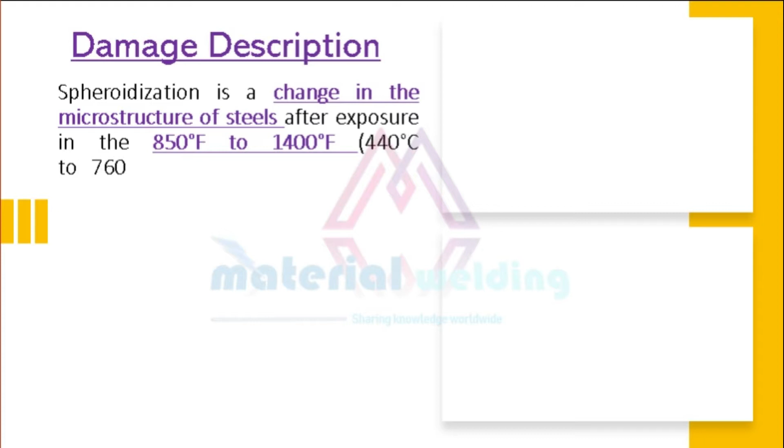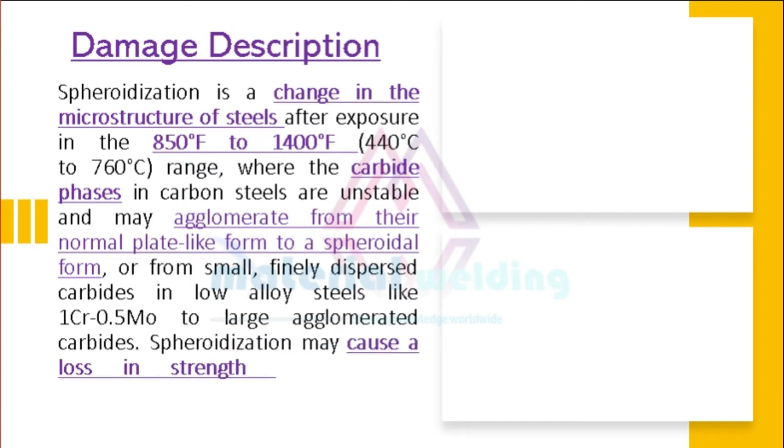So what is spheroidization? Spheroidization, also called softening, is a change in the microstructure of steels resulting from exposure in the temperature range of 850 degrees Fahrenheit to 1400 degrees Fahrenheit, or 440 degrees Celsius to 760 degrees Celsius.

At this temperature range, the carbide phases in carbon steels and carbon half-moly steels are unstable, and may agglomerate from their normal plate-like form to a spheroidal form, or from small, finely dispersed carbides in chromoly steels to large agglomerated carbides. Spheroidization may cause a loss in strength and/or creep resistance.

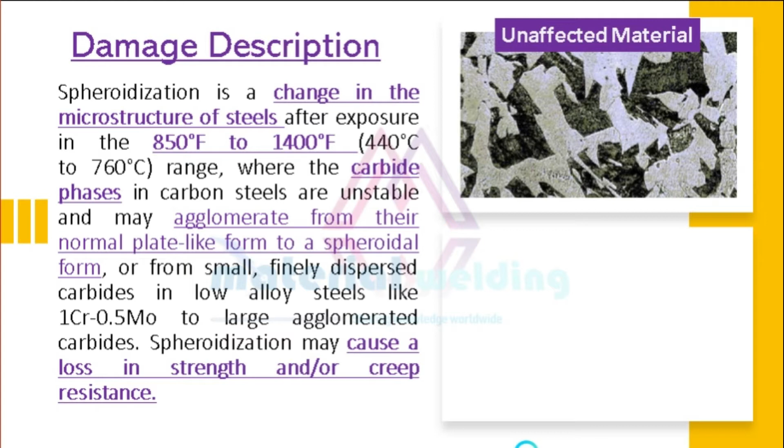The first picture shows the unaffected base metal of a carbon steel having pearlite and ferrite microstructure. When this material is exposed to high temperature above 850 degrees Fahrenheit, spheroidization takes place as visible by the black area in the second picture.

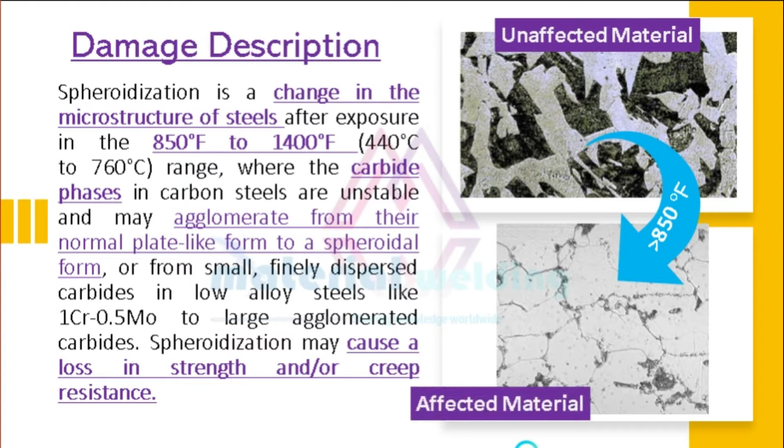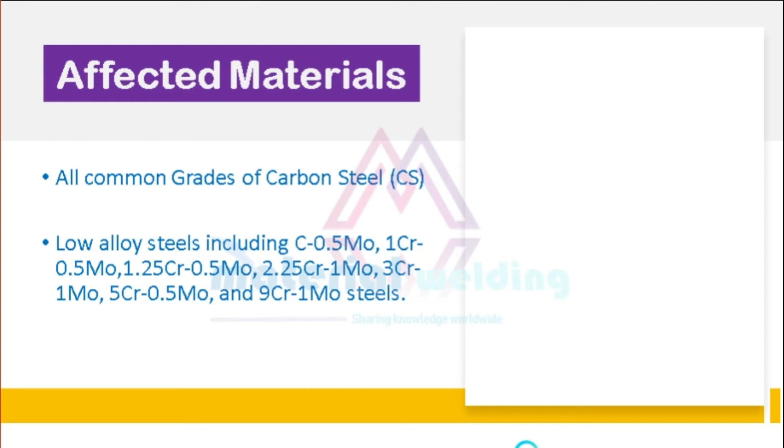Let's know which materials are affected by spheroidization. Spheroidization takes place in all common grades of carbon steel used in refineries. The low alloy steels such as carbon half-moly and chrome moly steel from 1 chrome half-moly to 9 chrome 1 moly are included. So basically, the full range of chrome moly steels are prone to spheroidization.

Critical factors for spheroidization. The primary factors affecting spheroidization are: A, chemistry of base metal; B, microstructure; and temperature and time of exposure.

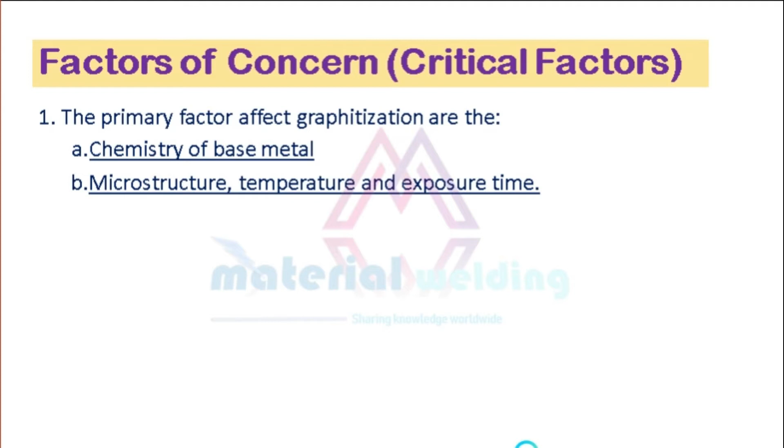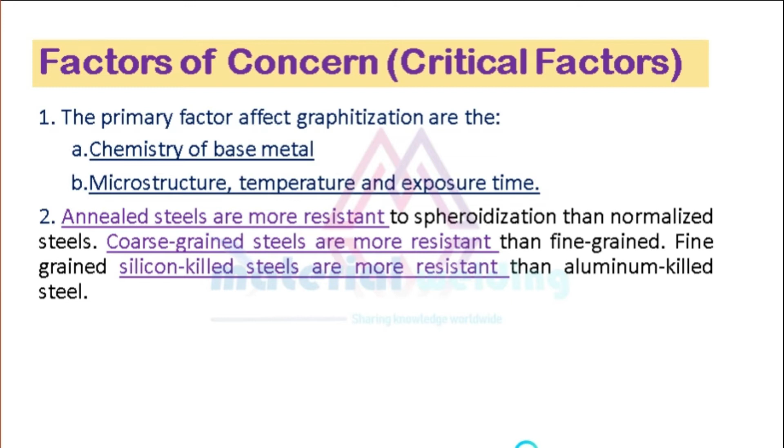If we talk about types of steel: first, annealed steels are more resistant to spheroidization than normalized steels. Second, coarse-grained steels are more resistant than fine-grained. And third, fine-grained silicon-killed steels are more resistant than aluminum-killed steel.

Time temperature transformation in spheroidization. The rate of spheroidization depends on the temperature and initial microstructure. Spheroidization can occur in a few hours at 1300 degrees Fahrenheit or 552 degrees Celsius, but it may take several years at 850 degrees Fahrenheit or 454 degrees Celsius.

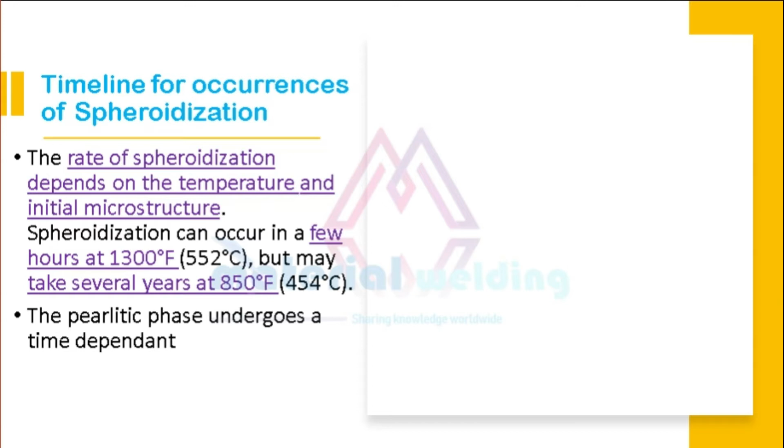So temperature is a critical factor for the transformation to occur. Higher service temperature means faster development of spheroidization. During spheroidization, the pearlitic phase undergoes a time-dependent transformation from partial to complete spheroidization, as shown in the figure here.

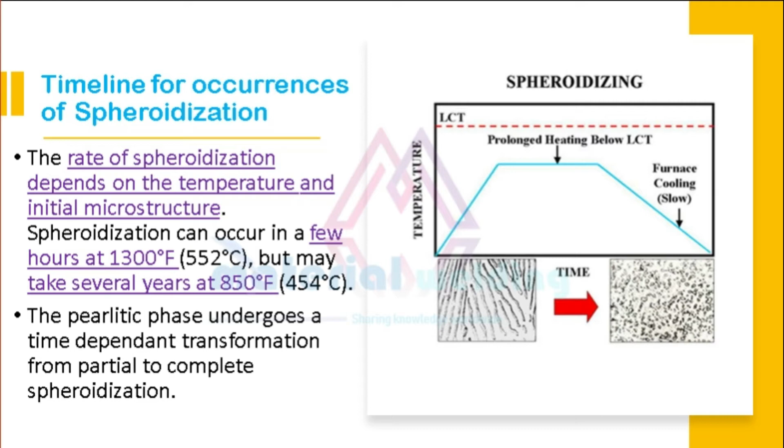Detrimental effect of spheroidization: it results in loss of strength, usually accompanied by an increase in ductility, which allows for deformation at stress concentrations, along with loss in creep strength.

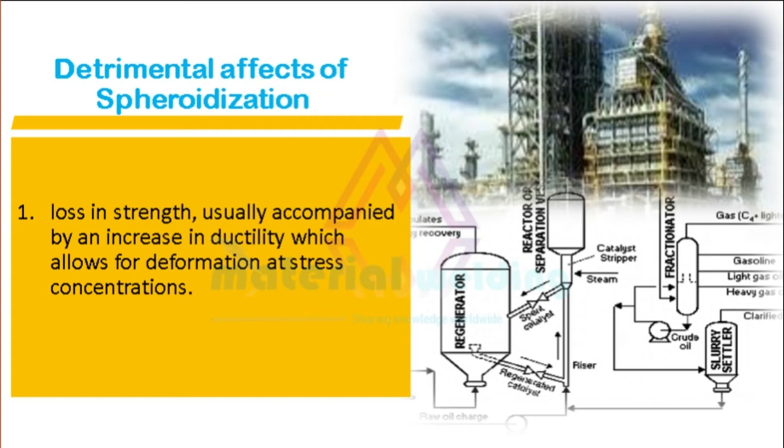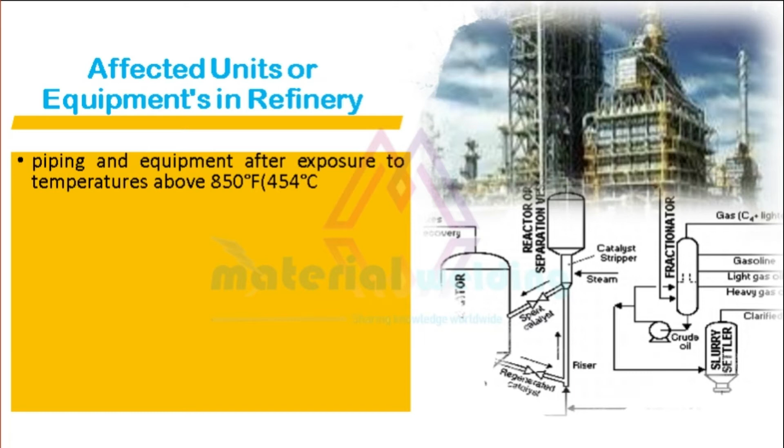Affected units or equipment in refinery: piping and equipment after exposure to temperatures above 850 degrees Fahrenheit or 454 degrees Celsius. The loss in strength may be as high as about 30%, but failure is not likely to occur except under very high applied stresses, in areas of stress concentration, or in combination with other damage mechanisms.

Spheroidization affects hot wall piping and equipment in the FCC, catalytic reforming and coker units. Fired heater tubes in boilers or process units may also be affected.

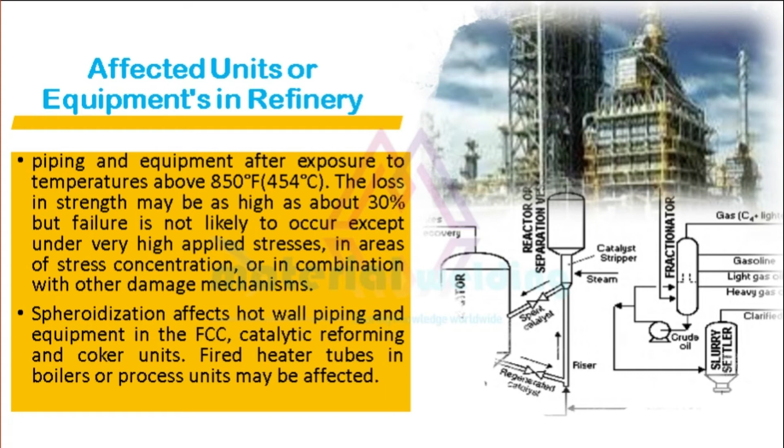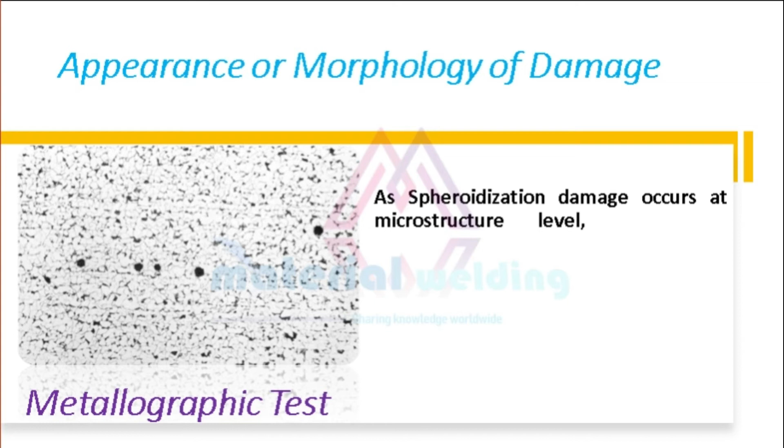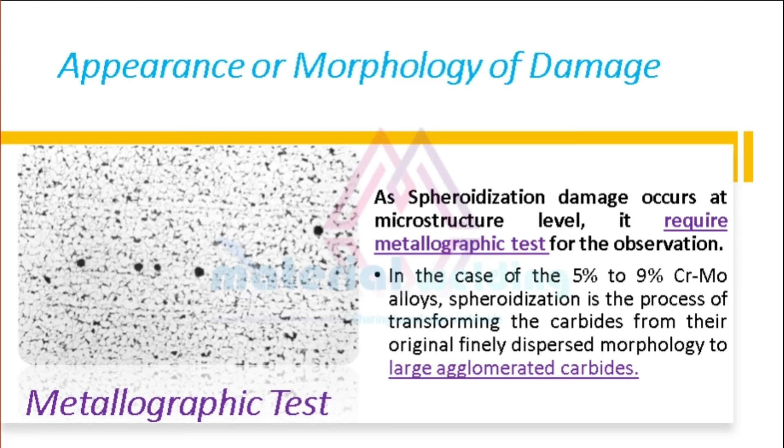Appearance or morphology of damage: as spheroidization damage occurs at the microstructure level, it requires metallographic testing for observation. In the case of 5% to 9% chromoly alloys, spheroidization is the process of transforming the carbides from their original finely dispersed morphology to large agglomerated carbides.

Prevention and mitigation of spheroidization: it is difficult to prevent, except by minimizing long-term exposure to elevated temperatures.

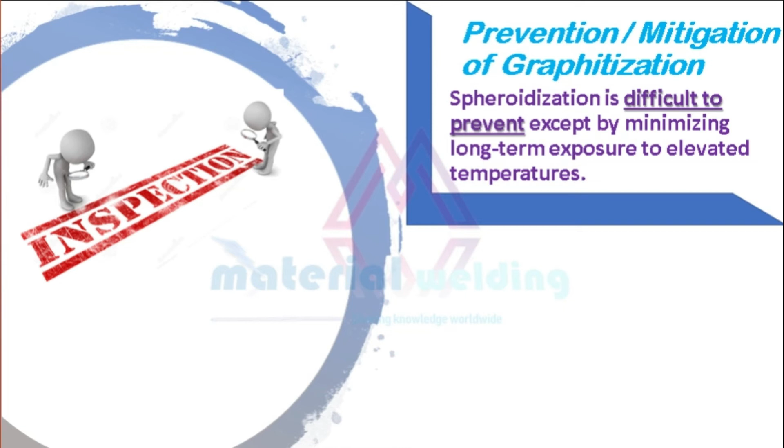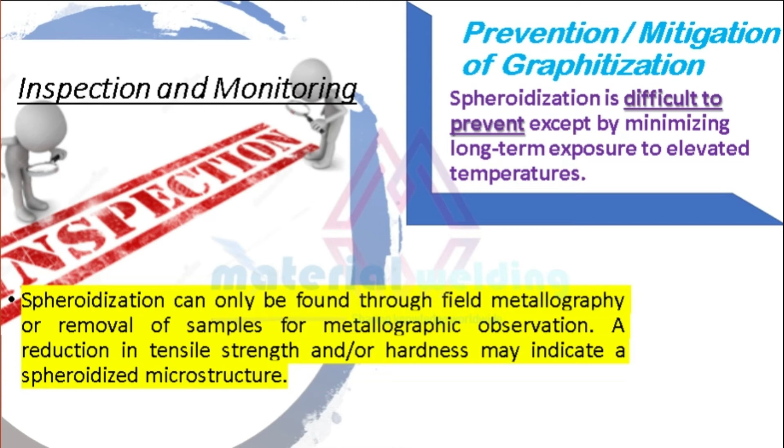Inspection and monitoring: spheroidization can only be found through field metallography, or removal of samples for metallographic observation. A reduction in tensile strength or hardness may indicate a spheroidized microstructure.

Here are questions related to the exam on spheroidization damage mechanism.